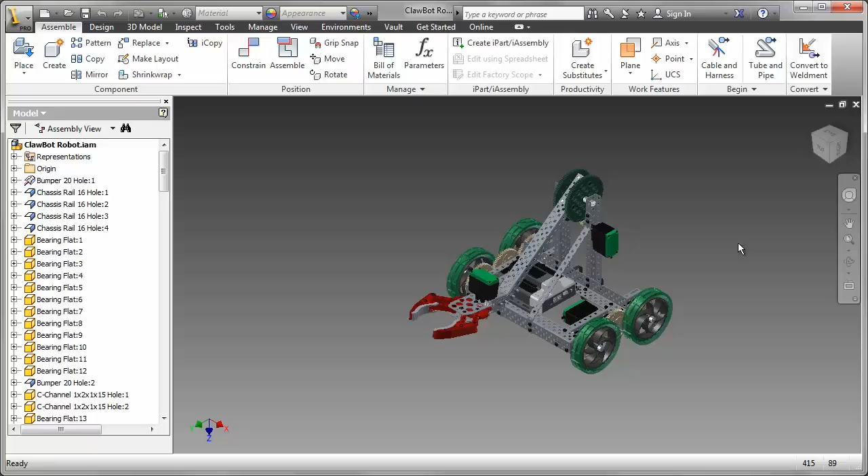Now that we've reviewed the completed ClawBot robot, we now have to come up with a workflow as to the best way to build this robot. I'm looking at the base frame, so I'm just highlighting those components for you. And I'm going to do that by starting a new assembly, using the English template and a standard assembly.

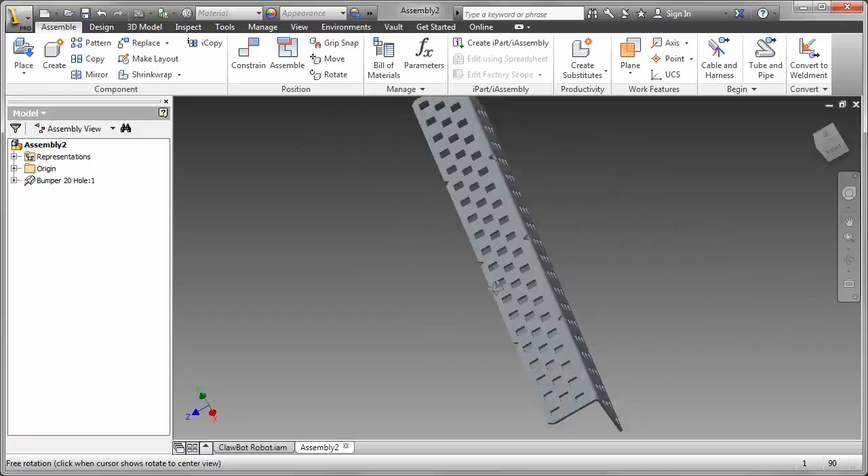Of course, there are no parts inside this assembly, so I'm going to place the first part, and this is what we call the grounded part. It has no degrees of freedom. And that's going to be the bumper 20 hole. I just need one of them, so that's okay. In the browser, you can see a little thumb tack by the bumper 20 hole. That also indicates that this is the grounded part.

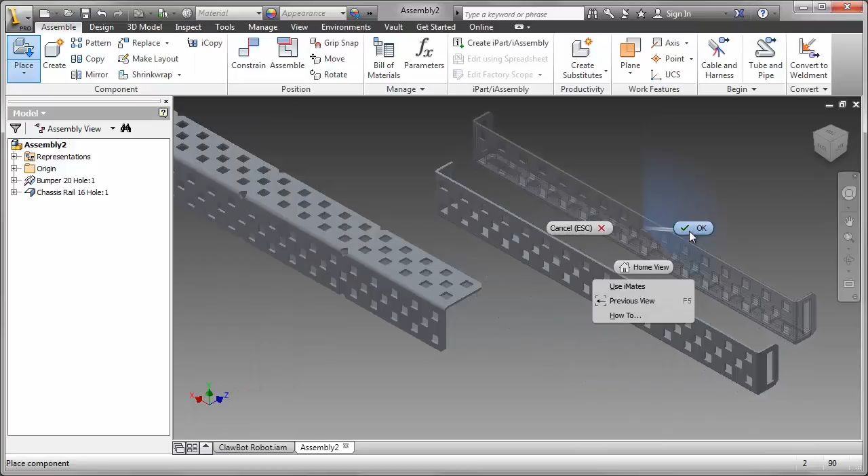I've rotated that part around, and I want to make that my home view. That's the way it looks in the robot, so I think it's better that we set that up. Now that we have the first part in, I'm going to place the second part. That will be the chassis rail 16 hole, and they're from the structure folder. We need 4 of them, but I'm just going to put 1 in for just now.

Now when I click on that part, you can see these funny white dots, right? Those are what we call iMates. And an iMate is 1/2 of a constraint, the other half being on the other part. And we'll see those in action right now.

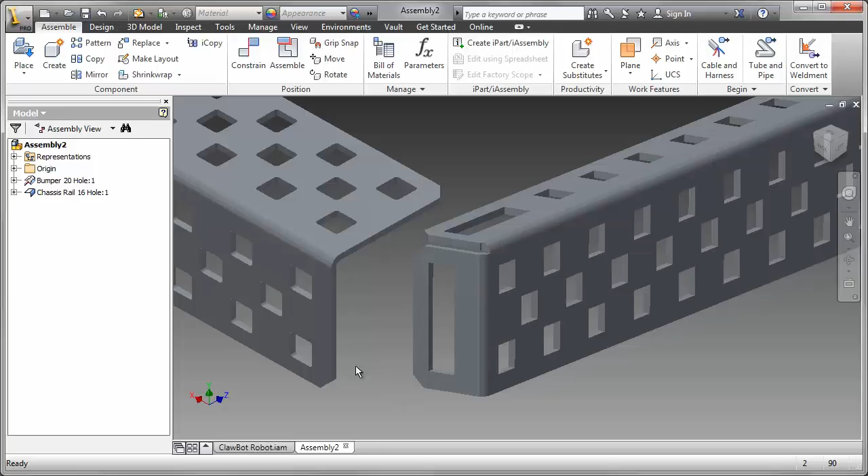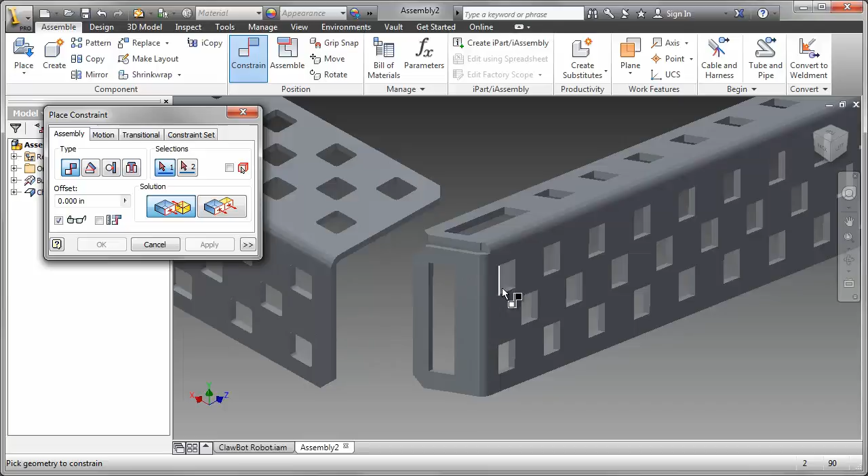Without the iMates, to constrain these two together, what I would have to do is select faces, perhaps the top face to the underside face, the end face to the inside face of the other part, and so on. So it would take quite a number of constraints. I might use one of these 4 types, such as mate, angle, tangent, or insert, and a different solution for each type. For example, with the mate constraint, I want to select the top to the underside, that end to the face. So that's 2 already, and I still don't have this together.

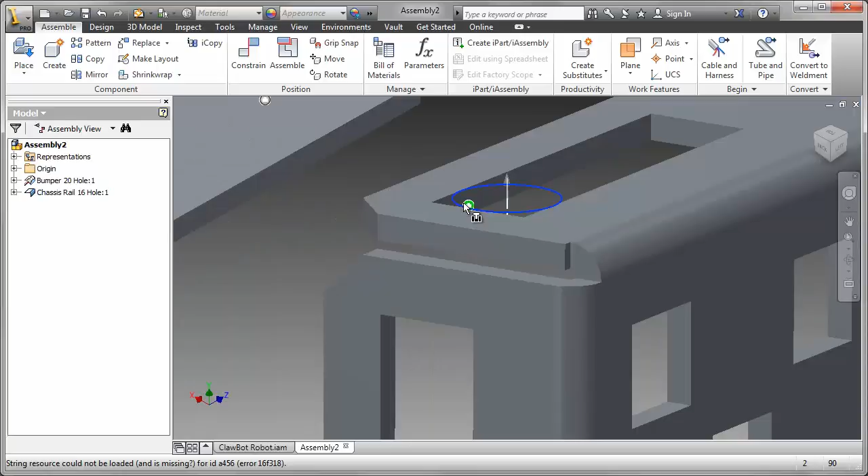So let's see how iMates can help us. I'm going to click on the part. You can see those white dots. I'm going to zoom in just a little bit so you can see them later on. But those dots are 1/2 of an insert constraint that I've added to each of these parts for you. And you can see the other half on the other part. Let's zoom in and see what they are. By clicking on that, we can see the circle indicating where that constraint actually is.

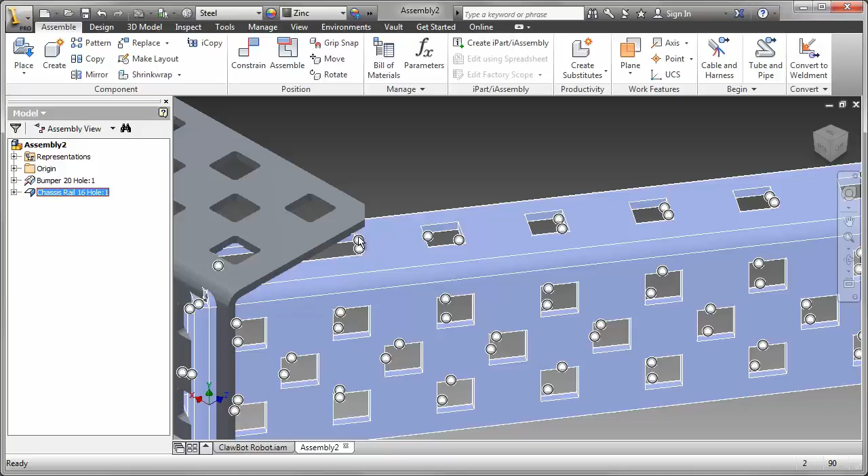Let's piece them together. Let's assemble them. So holding down the Alt key and selecting the insert, then releasing the Alt key, I can move that part around until I get the correct solution. Notice how it snaps to the correct solution. So you can just carefully move that around and get what you want. Hold down the Alt key, release the Alt key, move the part around, and in 2 steps, I have what would have taken probably 8 steps using a fairly typical process.